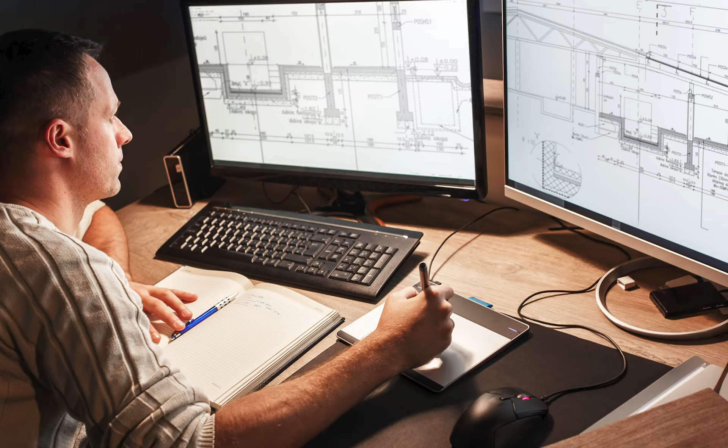Why AutoCAD users struggle with Revit, and how to finally make the switch. If you're an AutoCAD user who's tried Revit and felt completely lost, you're not alone. In fact, 73% of architects and engineers who attempt this transition give up within the first month. But here's the thing, it's not because Revit is harder, it's because you're approaching it all wrong.

I could almost say forget AutoCAD if you really want to learn Revit the right way, faster and more efficiently.

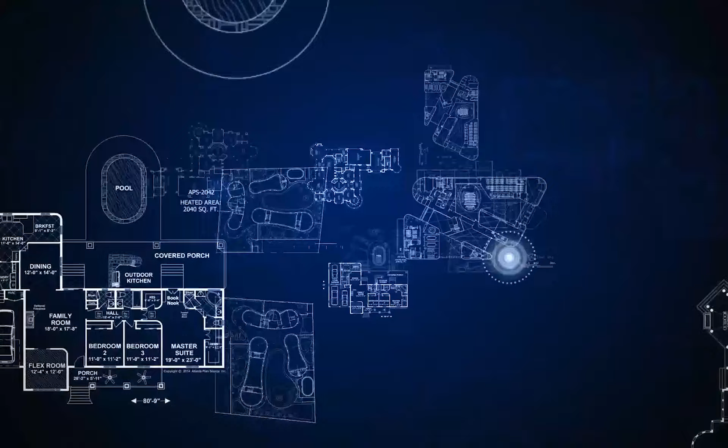Let me start with a story that might sound familiar. Last month, Sarah, a senior architect with 15 years of AutoCAD experience, called me frustrated. Her firm was switching to Revit, and despite being incredibly skilled in AutoCAD, she felt like a complete beginner again.

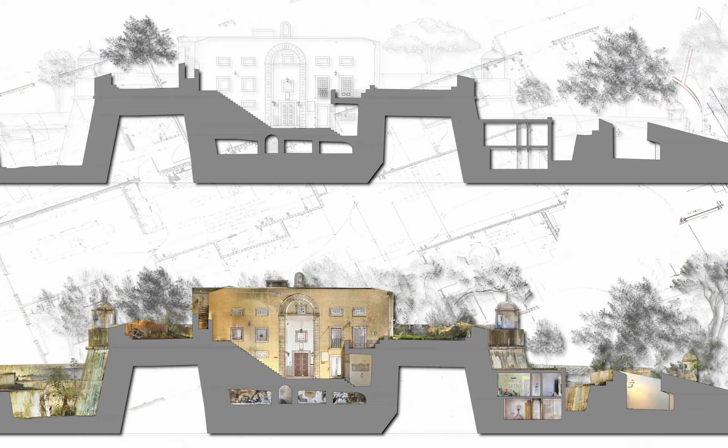Sound familiar? Here's what's really happening. The fundamental problem isn't your ability, it's your approach. You see, most people try to use Revit like it's just a fancier version of AutoCAD. But that's like trying to drive a helicopter the same way you drive a car. They might both get you places, but the principles are completely different.

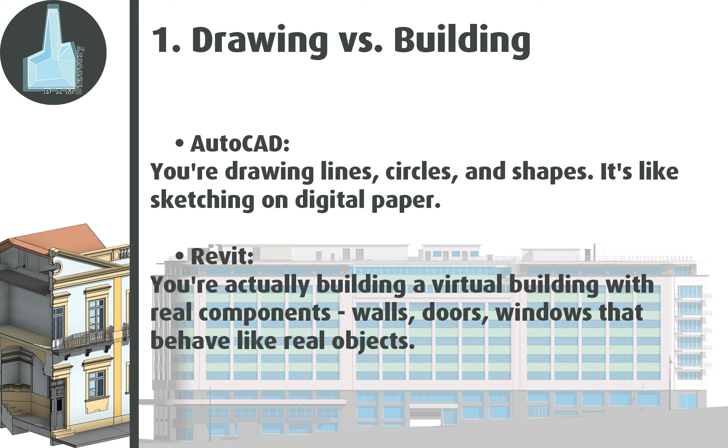Let me break down the key differences that are causing your struggle. First, drawing versus building. In AutoCAD, you're drawing lines, circles, and shapes. It's like sketching on digital paper. In Revit, you're actually building a virtual building with real components, walls, doors, windows that behave like real objects.

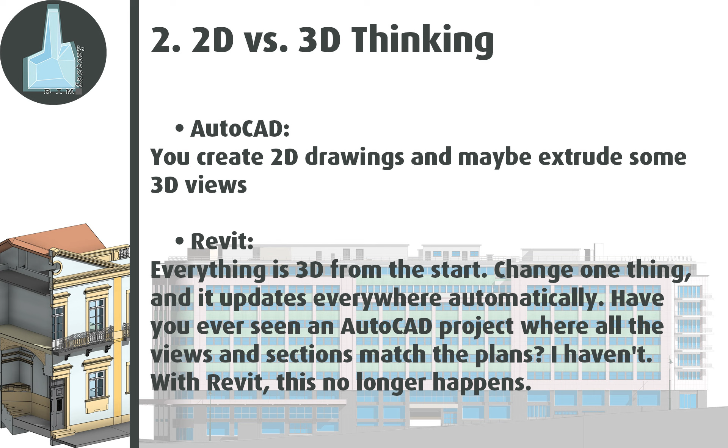Second, 2D versus 3D thinking. In AutoCAD, you create 2D drawings and maybe extrude some 3D views. In Revit, everything is 3D from the start. Change one thing, and it updates everywhere automatically. Have you ever seen an AutoCAD project where all the views and sections match the plans? I haven't. There's always some change that hasn't been updated in one of the drawings. With Revit, this no longer happens.

Third, manual versus intelligent. In AutoCAD, want to show a door in plan, elevation, and section? You draw it three times. In Revit, put it once and it appears correctly in all views automatically. And it puts all specialties in the same project, making possible, among other things, clash detection. This way, we can avoid more than 80% of problems during construction, during the execution design phase.

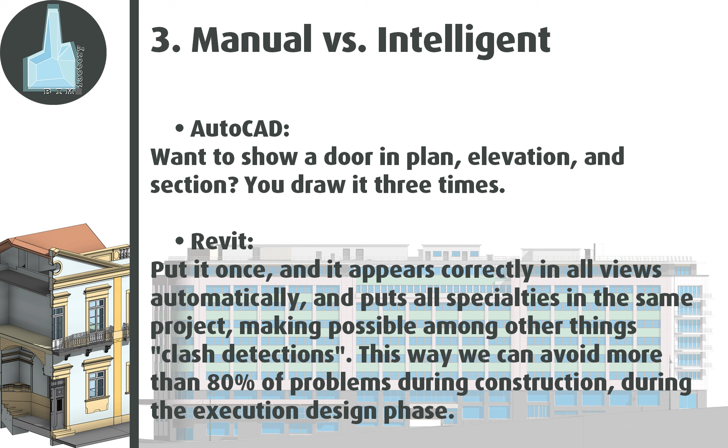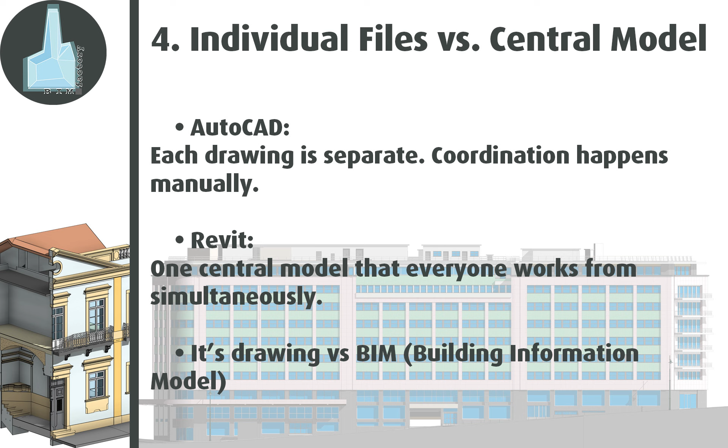Fourth, individual files versus central model. In AutoCAD, each drawing is separate, and coordination happens manually. In Revit, there's one central model that everyone works from simultaneously. It's drawing versus BIM, building information model.

But here's where most people get stuck. They try to recreate their AutoCAD workflow in Revit. It's like trying to use a smartphone like a rotary phone. Technically possible, but you're missing 90% of the power.

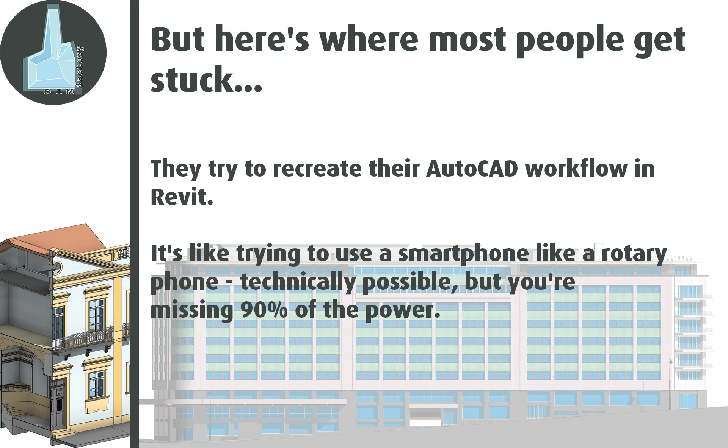Why people struggle: after working with hundreds of professionals making this transition, I've identified the top 5 reasons people struggle. First, wrong learning sequence. Most people jump straight into modeling without understanding Revit's logic. It's like trying to write a novel before learning the alphabet.

Second, fighting the software. Instead of learning Revit's way of doing things, they try to force their AutoCAD habits. This creates frustration and inefficiency. It helps to have a good understanding of how things are constructed and, consequently, how detailed drawings work. With this in mind, we'll understand Revit's logic and its hierarchy within families, and the program will suddenly become easy to learn. This is one of the core points in the courses I teach.

Third, information overload. Revit has thousands of features. Most people try to learn everything at once instead of focusing on the 20% that gives 80% of the results.

Fourth, no structured path. YouTube tutorials and random online courses leave gaps. You end up with scattered knowledge, but no cohesive workflow. Fifth, lack of real-world application. Learning tools in isolation doesn't help. You need to understand how they fit into actual project workflows.

Here's what I've learned after helping so many professionals make this transition successfully. The secret isn't learning more tools, it's learning the right sequence. Think of it like learning to cook. You don't start by trying to make a 5-course meal. You start with basic techniques, then build complexity.

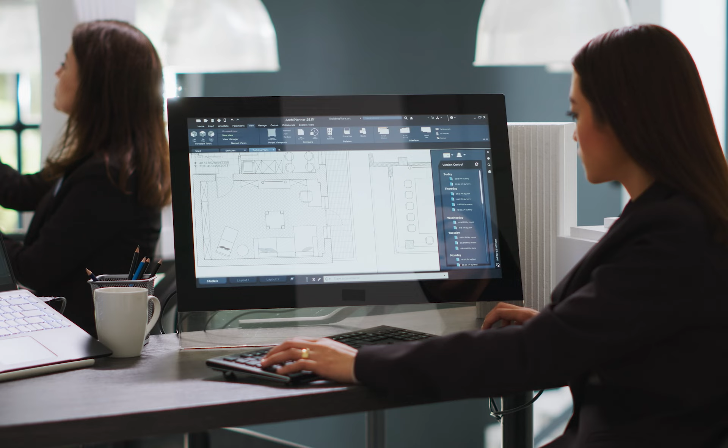The professionals who succeed follow what I call the foundation first method. Week 1 to 2, master Revit's core logic and interface. Week 3 to 4, build your first complete project using proper workflows. Week 5 to 8, advanced techniques and family creation. Week 9 to 12, real-world project scenarios and troubleshooting.

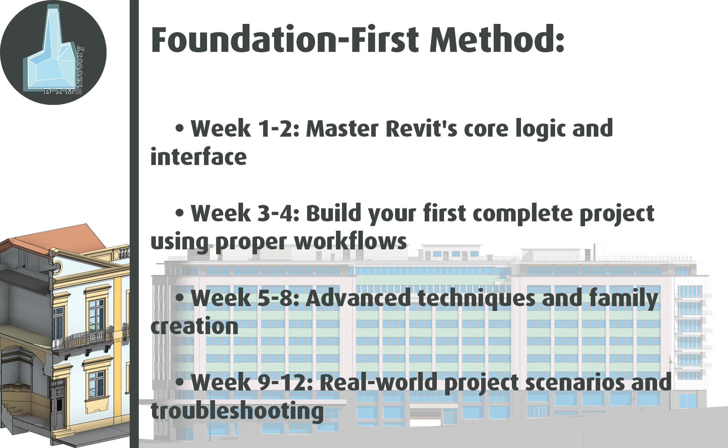But here's the key. You need someone who's been through this transition themselves and has guided others through it successfully. Over the past 20 years, I've developed a systematic approach that's helped several AutoCAD professionals become confident Revit users in just 3 months. My students don't just learn the software, they transform their entire design process, and often see salary increases of 15 to 30% within 6 months of completing the transition.

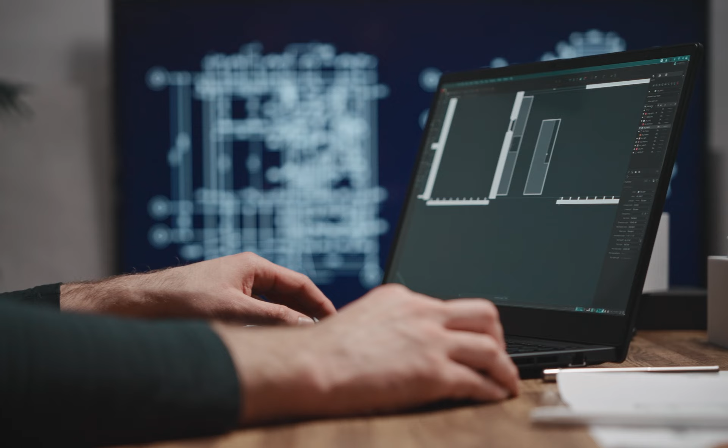But whether you work with me or not, remember this: the transition from AutoCAD to Revit isn't about learning new software. It's about learning a new way of thinking about design and information.